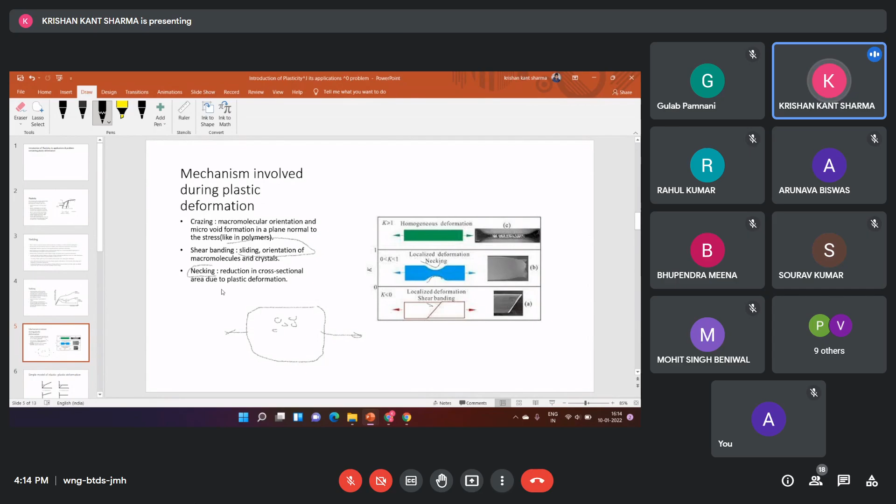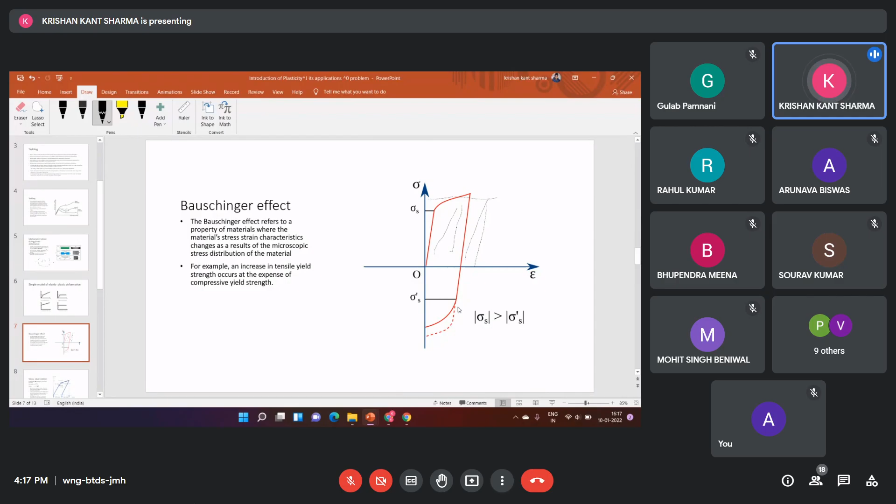Its yield limit will change - this is the effect of the Bauschinger effect. For example, when we apply tensile stress on a material up to the yield stress limit, then unload it, and then apply stress again as compression stress - opposite direction to the first one - then it will show its yield limit is now less than the initial yield limit. This is the Bauschinger effect.

Generally we neglect this effect during our study because we choose the same yield limit for compression and tensile stress for our study purpose.

Now I will show you, as in plastic elasticity analysis we study Hooke's law for stress-strain analysis, but in plastic strain there is no particular law for study. There are some empirical stress-strain equations for this. One of them is the Ludwik-Hollomon law, in which the stress-strain relation involves an exponential coefficient for the applied stress.

This will show the curve formation, and we will show the effect of the strain hardening coefficient, generally for ductile materials. So, strain hardening in general.

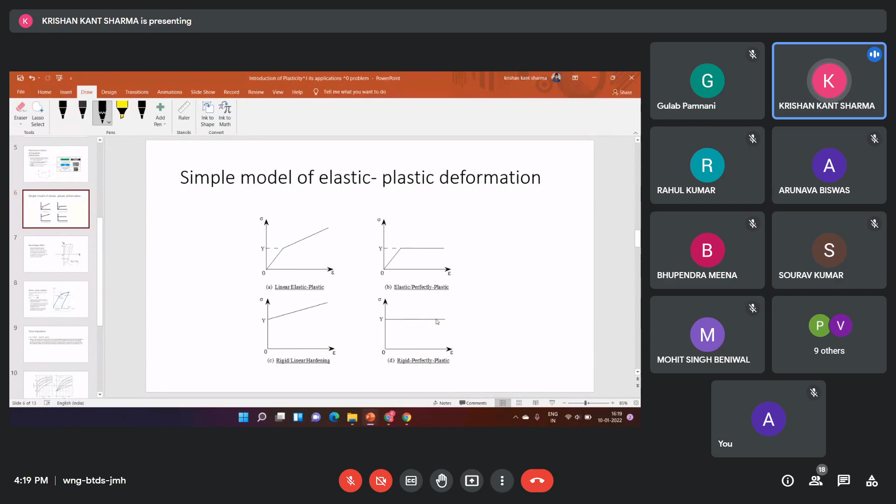The plastic strain is considered as the localized strain with respect to study, in which the total strain is the plastic strain plus elastic strain, and this formula is for plastic deformation up to the yield point, from the non-linear elastic limit to the yield point, as we study what the material's path is to failure.

Higher the value of strain hardening, the more hardened the material. If n equals 1, then the material behaves as an elastic material for the linear limit, as we use in Hooke's law. There is another equation for plastic deformation - this is the Voce equation, which also relates stress and strain.

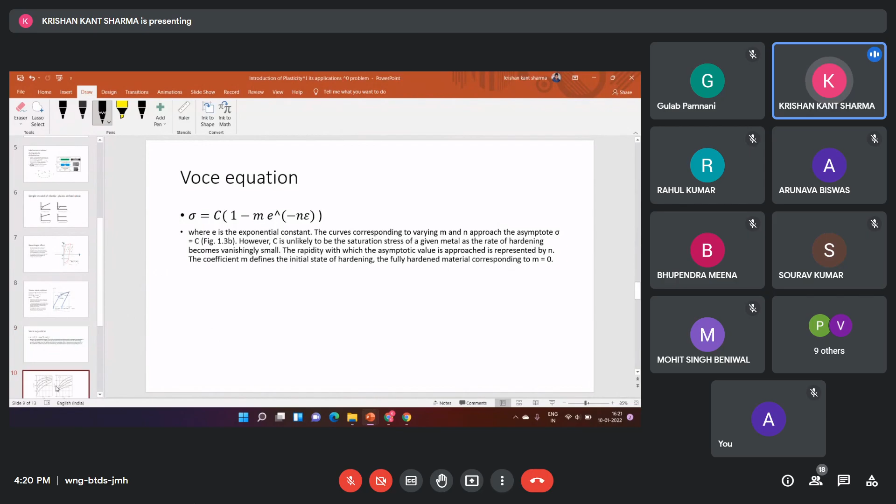As shown in these graphs from the empirical equations, as the strain coefficient increases, the strain hardening also increases. As we study in the material, strain hardening increases with the strain hardening coefficient, and its work increases exponentially.

For further information, the next group will elaborate. There is another relation - also an empirical equation - from the Ramberg-Osgood equation. It also relates to the strain hardening coefficient, which will show the relation curve of the strain curve for different strain hardening coefficients.

Okay, these are some basics about plasticity, and there will be more information about this. We can take some theory books in which more details are shown, and we can also refer to some NPTEL lectures. Now my friend Arunava will give you some abstracts.

Before moving ahead - yes, sir. I hope you have covered your presentation, right? Yes, sir. So I have some questions. Yes, let's take it. Okay, first go to the first slide. This is just suggestions, not questions, right?

Here, these statements that you have on the left side - did you write them on your own, or the paragraph? No sir, I took it from the book and some NPTEL lecture. So that's what I'm saying - you should write your own bullet points. What you are planning to convey in a particular slide, you should write that as bullet points instead of taking a direct image from whatever you see. Okay?

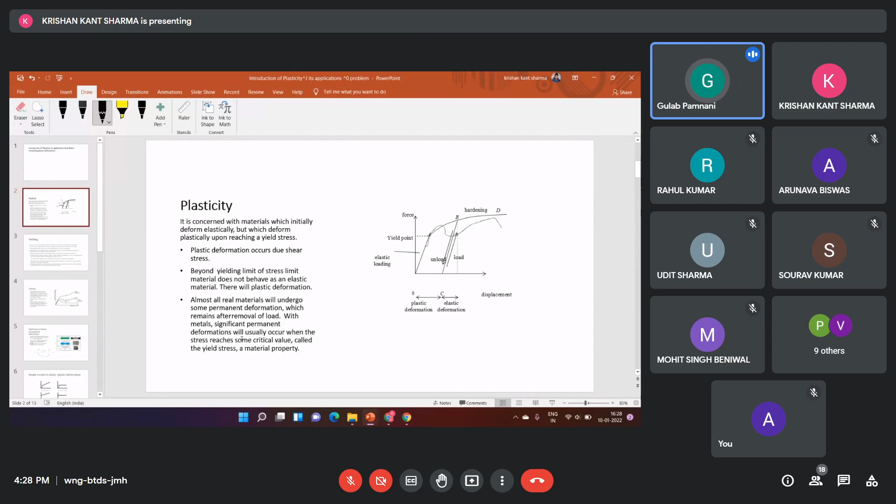Yeah, so that's the answer I was expecting. What Udit has said, there are applications where you work on materials in the plasticity regime, like he said - when you go for manufacturing of components, you go for deep drawing, extrusion, or whatever you are doing. In the process of manufacturing, the application of plasticity comes in.

Not on the shaft, as I was saying as an example. The structure you are building, there you are ensuring that the material doesn't yield. There you already take a factor of safety and all those things, and you are not willing at all to go into the plastic limit - that it may go, that's a different case, that's a failure, right? Yes, sir.

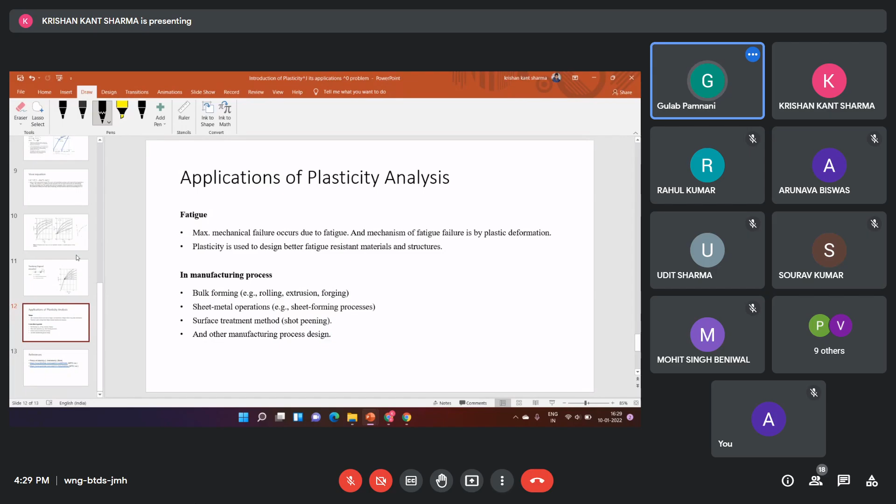आपने एक स्लाइड पे जाओ। Now there was you talked about the sliding somewhere, right? Sliding. So and strain hardening की बात की। strain hardening क्यों होता है?

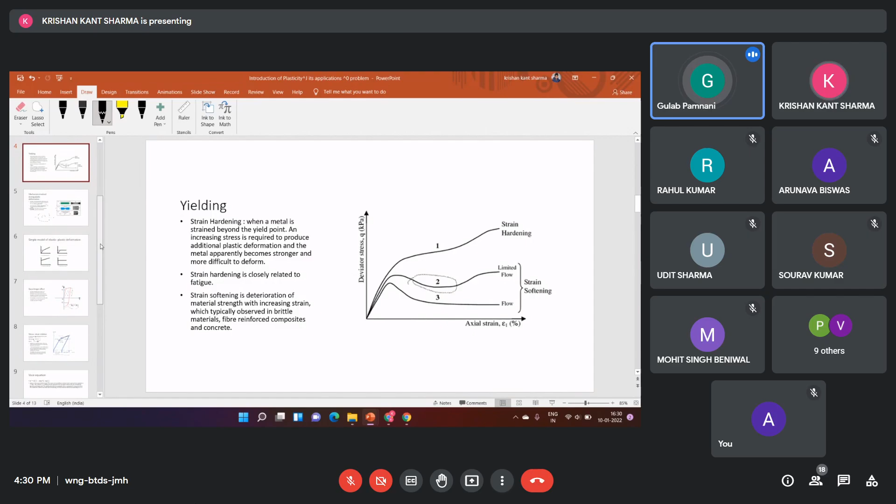स्ट्रेन हार्डनिंग होती है जैसे मटेरियल की स्ट्रेस इंक्रीज करने के लिए, स्ट्रेस इंक्रीज करते हैं इसके लिए, तो उसमें वो स्ट्रॉन्गर बनता जाता है, मतलब उसकी प्रॉपर्टी। yeah, that's okay, but why does it happen? What is actually the reason behind it? You need to explain it.

Sir, is there any dissipation of energy to the molecules? वो तो प्लास्टिसिटी की बात कर रहे हैं, परमानेंट डिफॉर्मेशन, स्ट्रेन हार्डनिंग पे हम कह रहे हैं व्हाई। आपने कहीं मोमेंट ऑफ डिसलोकेशन की बात की? Yes sir, movement of dislocation sir, कहाँ पे बात की थी? yes sir, movement of dislocation sir.

So this movement of dislocation increases the resistance to the applied stress, yes sir, जिसकी वजह से स्ट्रेन हार्डनिंग होगी, ठीक है? yes sir, ओके।

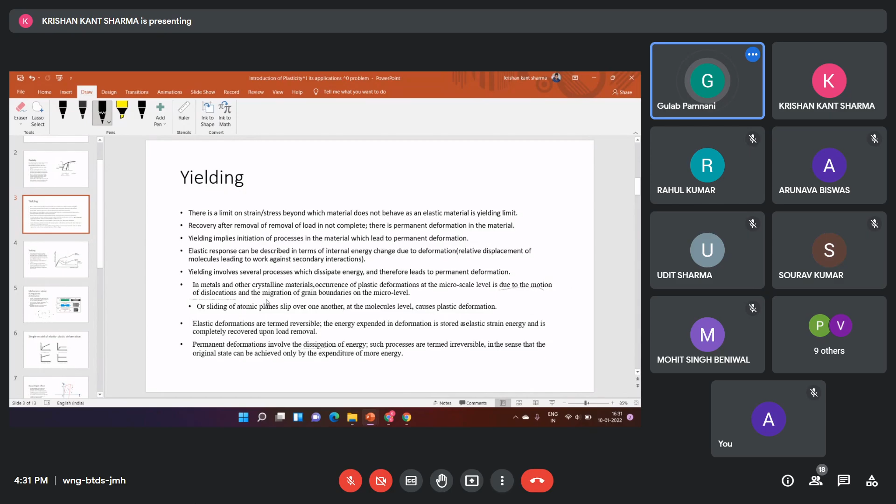Now let's move to the stress strain relation that you talked about. यहाँ पे ये स्ट्रेस स्ट्रेन रिलेशन जो आपने दिखाया है, ये प्लास्टिसिटी डिफाइन करता है कि नॉन लीनियर इलास्टिसिटी डिफाइन करता है? Non-linear elasticity sir।

तो आपने प्लास्टिसिटी की बात की ना कि... Actually sir, this is not only for the elastic deformation, it's also for the plastic deformation study।

अच्छा, ये प्लास्टिक डिफॉर्मेशन में वैलिड होगा? Yes sir, it depends on curve slope sir। अच्छा, तो अगर मैं इसमें एप्सिलॉन को 0 कर दूं तो सिग्मा की वैल्यू 0 आ जाएगी, yes sir, है ना?

तो जब आप इसको प्लास्टिक जोन में देखते हैं, ये इलास्टिक प्लास्टिक को बता रहे हैं, नॉन लीनियर इलास्टिक को बता रहे हैं, या प्योरली प्लास्टिक को बता रहे हैं? ये रिलेशन मुझे जरा बताएंगे। in plastic region sir। सिर्फ प्लास्टिक रीजन में?

इसको थोड़ा पढ़िएगा, क्योंकि मुझे ये लग रहा है कि ये नॉन लीनियर इलास्टिसिटी का इक्वेशन आपने लिखा है। Okay sir, ठीक है? प्लास्टिक रेंज में नॉर्मली जो सिग्मा है डायरेक्ट एप्सिलॉन से कोरिलेट होने की बजाय इंक्रीमेंटल फॉर्म में होता है, ठीक है?

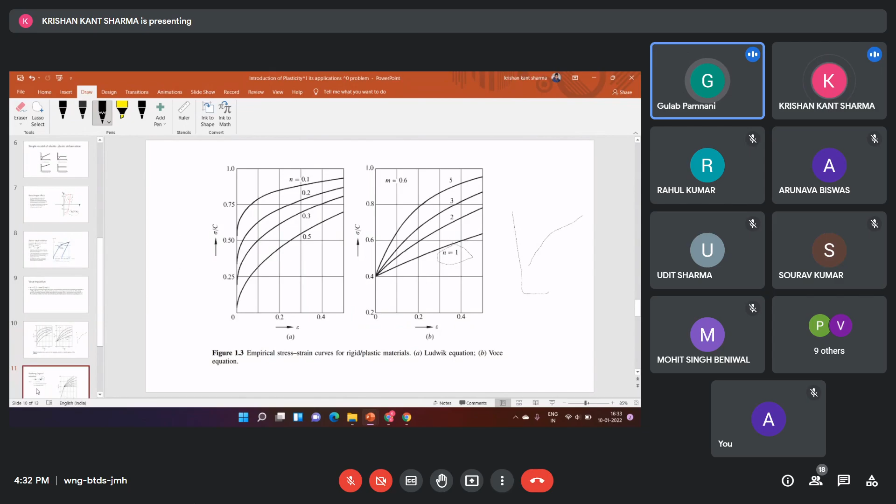जस्ट गो अहेड एंड सी इट। रेम्बर्ग ऑसगुड मॉडल भी जो आपने बताया, ये सब इलास्टिक तक तो वैलिड नहीं, इलास्टिक के बाद के लिए वैलिड है, राइट? आप ये कह रहे हो कि रेम्बर्ग ऑसगुड मॉडल जब आप इलास्टिसिटी क्रॉस कर गए, उसके बाद के इक्वेशन के लिए ये वैलिड है, फिर उसमें एम आपके स्ट्रेन हार्डनिंग कांस्टेंट और ये जो आपने अल्फा कहा...

so these will vary after once you cross the yield, then this relation is valid, right? Yes sir। विद इन इलास्टिक तो आप ये कह रहे हो कि इस डायग्राम से this is Hooke's law? Yes sir, Hooke's law, yes.

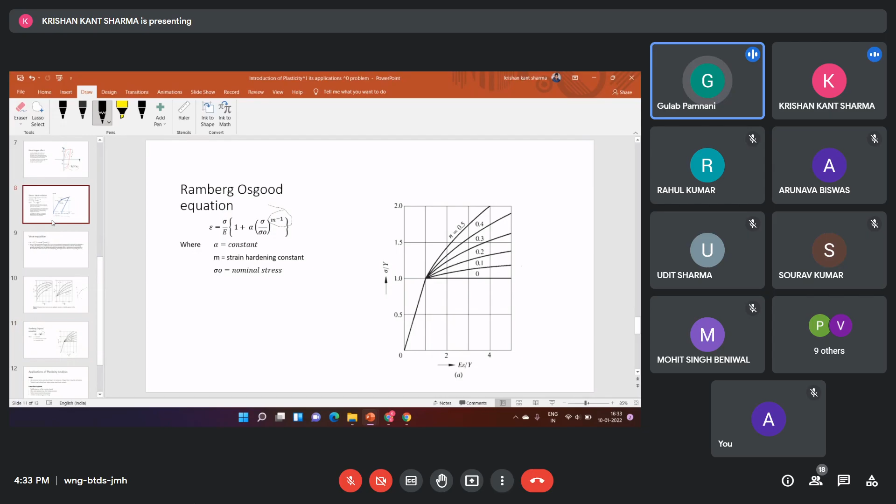Up to yield limit. हाँ, तो पिछली वाली जो इक्वेशन हमने कही, दैट इज व्हाट यू शोड, इसमें अगर n की वैल्यू 1 कर दूं तो हुक्स लॉ वैलिड है, ठीक है? yes sir। और अगर दूसरी कोई वैल्यू करूं तो, मुझे अभी भी लगता है दिस लुक्स लाइक नॉन लीनियर इलास्टिसिटी।

Okay sir, up to yield limit. हाँ, तो नॉन लीनियर इलास्टिसिटी में मतलब वो हुक्स लॉ फॉलो नहीं कर रहा है, मगर वो इलास्टिक है, राइट? Okay sir।

Good afternoon, sir. Yeah, good afternoon. Good afternoon, everybody. Myself, Arunava Biswas. Today I am going to describe about application of plasticity.

As we all know, plasticity is the propensity of a material to undergo plastic deformation under load. Here are some pointers to answer why we apply plasticity.

The first one is fatigue. Fatigue is defined as a process of progressive localized plastic deformation occurring in a material subjected to cyclic stresses and strain at high stress concentration locations, that may culminate in cracks or complete fracture after a sufficient number of fluctuations. As we know, maximum mechanical failure, approximately 50 to 90%, are by fatigue, governed by plastic deformation. So in order to design better fatigue resistant materials structure, we use plasticity.

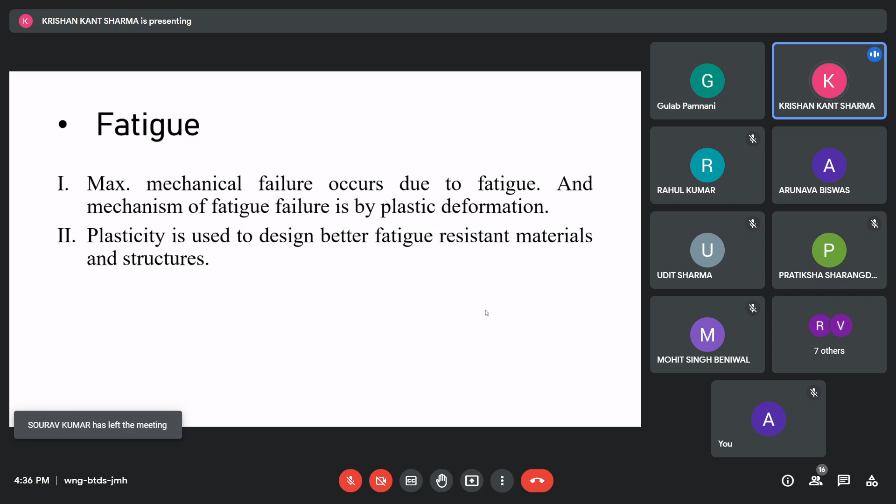Second one is the manufacturing process. Plasticity is used in manufacturing process design. Plastic deformation is involved in many mechanical forming processes. Some are rolling, forging, extrusion, wire drawing, deep drawing, and many others.

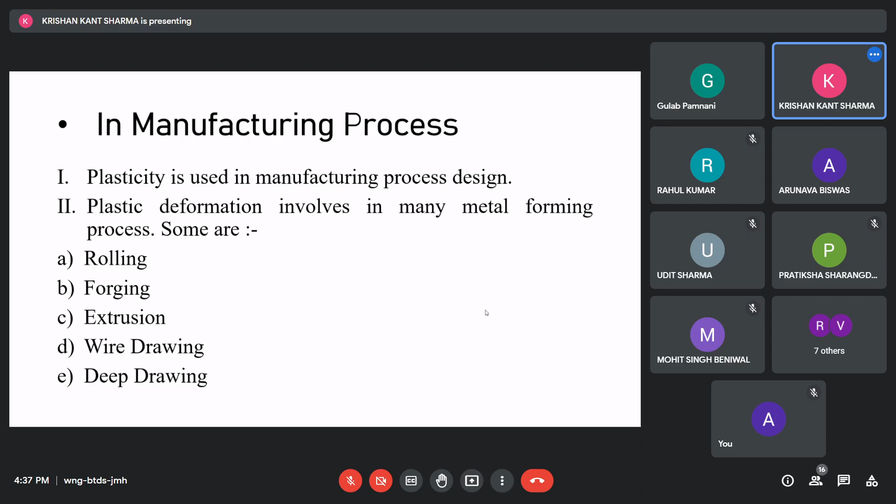In rolling, material is plastically deformed by passing between rollers. The plastic deformation in material is due to the biaxial compression applied by the rollers on the material.

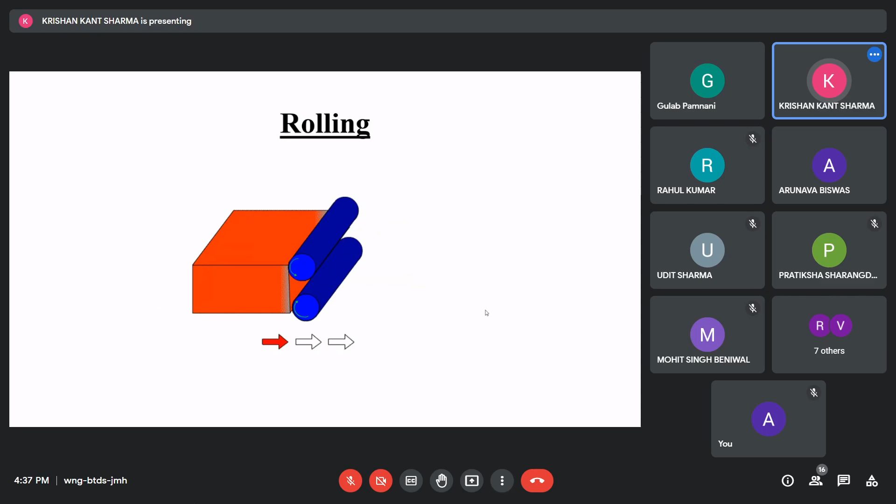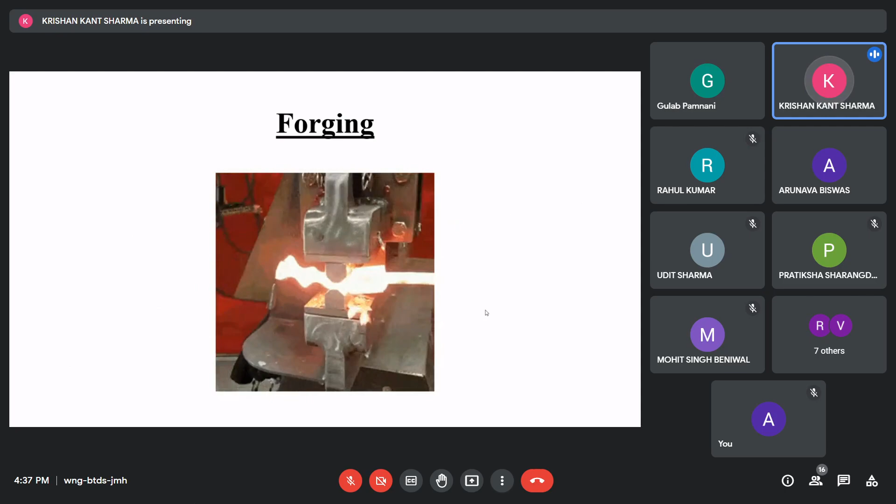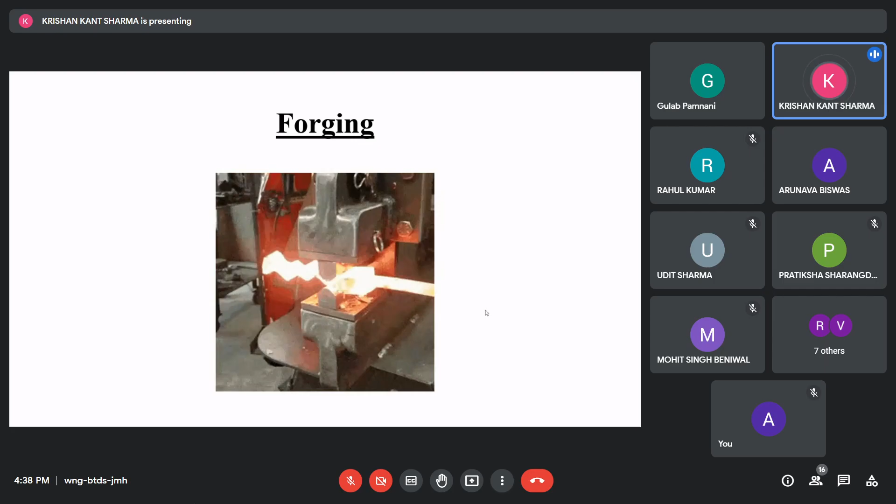In forging process, material is plastically deformed through hammering, pressing, or rolling. The compressive forces are delivered with hammer or die. So the plastic deformation in metal is due to the compressive forces applied by the hammer or die.

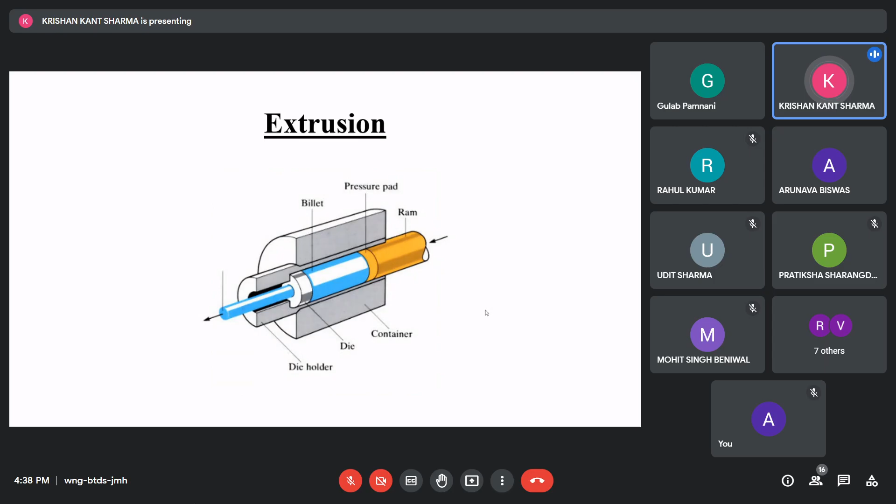Extrusion is a process which is used to create objects of a fixed cross-section profile by pushing material through a die of a desired cross-section area. Here, plastic deformation in material is due to triaxial compression.

Now, wire drawing. Wire drawing is a cold working process used to reduce the cross-section area of a wire by pulling the wire through a single or series of drawing dies. Drawing operations involve pulling material through a die by means of tension force applied to the exit side of the die. Here, the plastic deformation is caused by the compressive force arising from the reaction of the metal with the die.

Deep drawing is a sheet metal forming process. The process is considered deep drawing when the depth of the draw part exceeds its diameter. It is a combination of drawing and stretching. In this process, sheet metal blanks are converted into desired shape of component by pressing the central portion of the sheet into die opening using a punch. So here, plastic deformation of metal is due to the compressive force and tensile force.

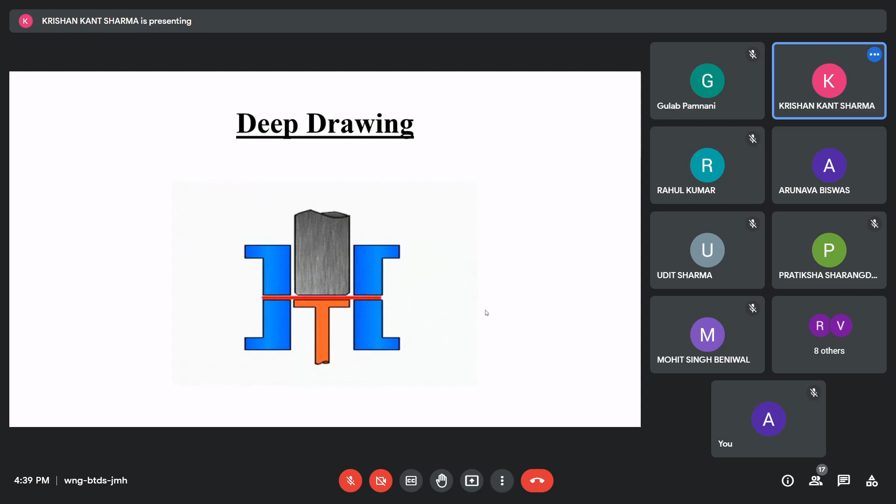Okay, so mostly you have covered the applications, right? Yes, sir. Okay, so nothing much to ask in this. I don't think there is anything to ask. So let's move to Udit then. Okay, sir, thank you sir.

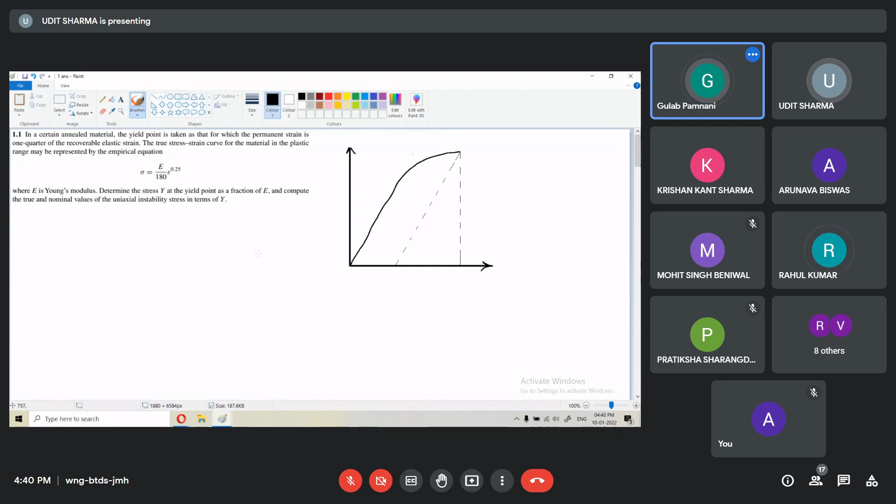So I'm going to discuss some questions related to plastic deformation, which I have selected from the book. Is my screen visible? Am I audible? Yes, hello, it is. Okay, so should I start? Okay, go ahead.

In question number one, we have a certain annealed material whose yield point is taken as the point for which the permanent strain is 1/4 of the recoverable elastic strain. The stress strain curve for the plastic range is represented by an empirical equation. We have to find the stress at the yield point in terms of E, and the true and nominal value of the uniaxial instability stress in terms of Y.

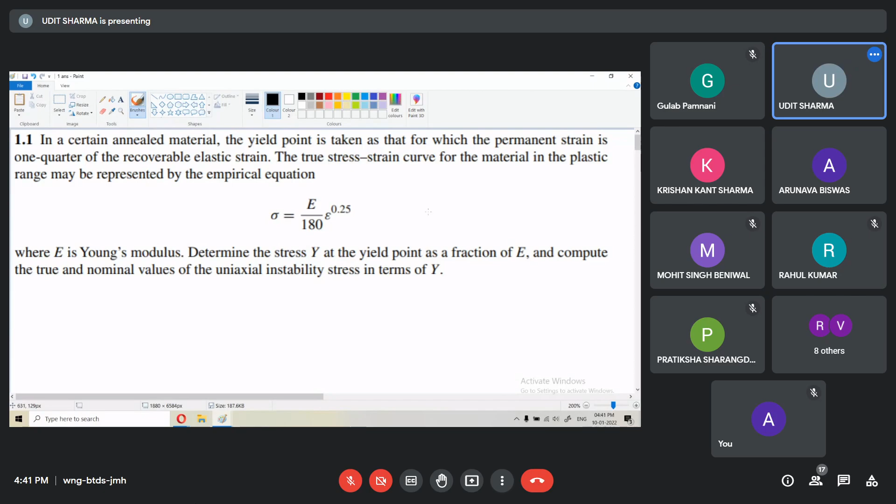So we are annealing a material. Annealing simply means we are heating a material above its recrystallization point and allowing it to cool down in the furnace only. That is a way of reducing the stress after casting.

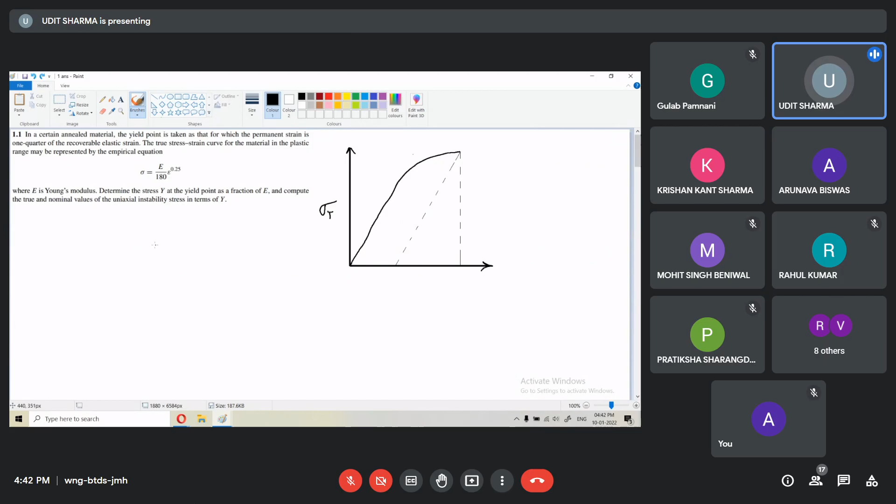So I have drawn a graph here already, which shows the true stress and true strain values between them. So here our material is going from O to A and to B. From O to A is the elastic limit of the material, and from A to B is the plastic limit.

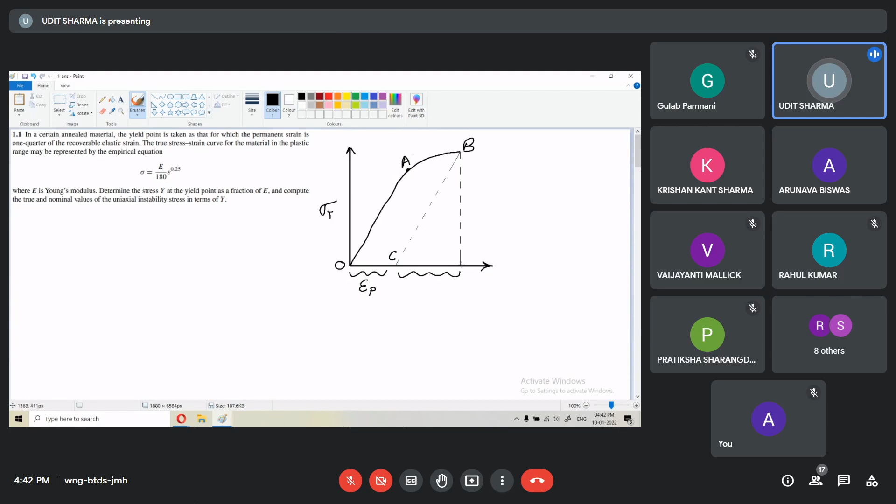If we unload the material at A, the material will return to its original position O. And if we go beyond point A, till point B, it will only return to point C. So whatever we do, we cannot go back from point C to point O. So this portion will be called the permanent strain portion. And because this portion of the strain is coming back or recovering, this is called temporary strain or recovery strain.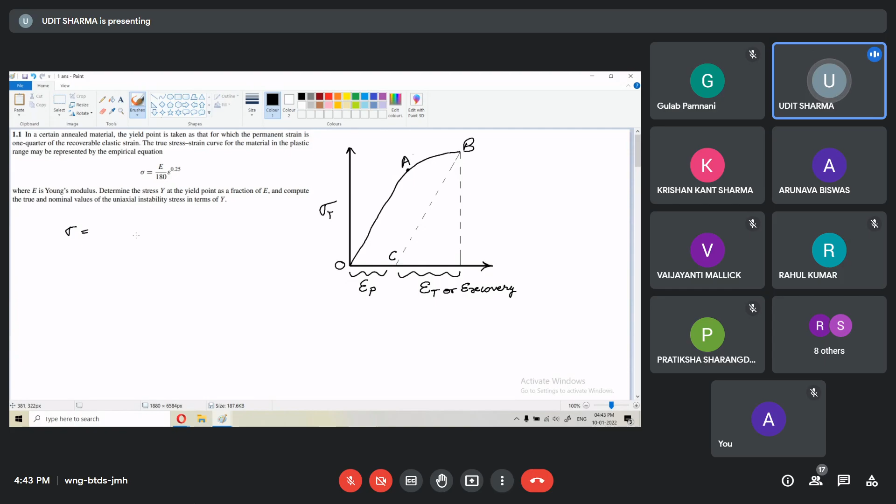So here we can easily start by, we have an empirical relation as E over 180. So first we need to find sigma at B in terms of E, and we need to find sigma at A. Yes, we need to find ultimate at instability. Instability, I'll explain in a minute.

So we start by first calculating the strain at point B. Strain at point B we can easily conclude as permanent strain plus our temporary strain. As given in the question, the permanent strain is 1/4 of the recoverable, 1/4 of the temporary strain. So that will give us the value as 5/4 of true strain.

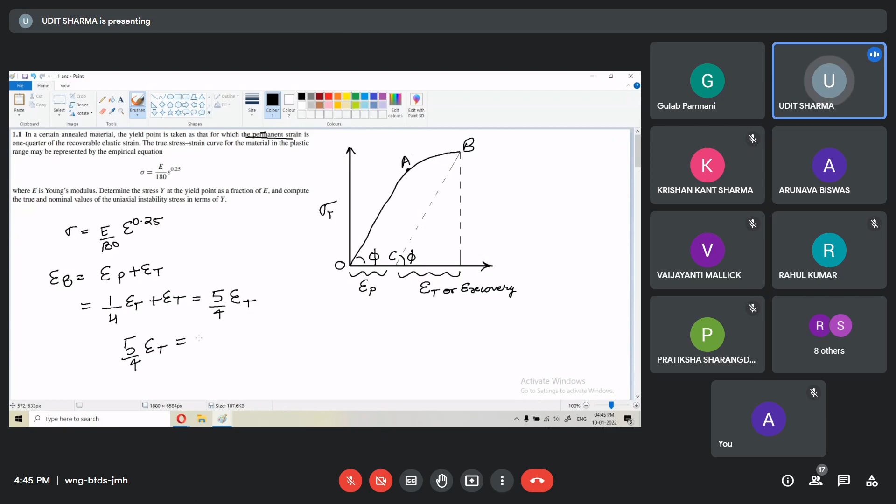Now we can easily put this into the equation, this is yield, E over 180, 5/4 of... sorry, I forgot one important thing before this. I need to explain, very sorry for this. We need to further divide the temporary strain into components. So this slope, at this point and this point, is the same. And we all know the slope of the stress strain curve is equals to this part, sigma yt, yield, and this one is the temporary strain. The slope of the stress strain curve is E, the Young's modulus, sigma yt divided by epsilon t.

So we can easily put true strain as yield stress over Young's modulus. We need to put that here, it becomes this. Now we put this in our main equation.

Yes sir, Udit, can you come again? Sir, which part, from the start or some point, not between? From this, not from the start. You have added this strain, that's fine, 5/4, okay, epsilon times t, whatever you said. Okay, then after that you can proceed. So replacing epsilon t with sigma y by E, this part. Yeah okay, that's fine, that is clear to me. Okay go ahead, go ahead. Should I explain it to others again or should I go ahead? Others, if anybody has any question they can ask, or we can proceed. No sir, okay you can proceed then.

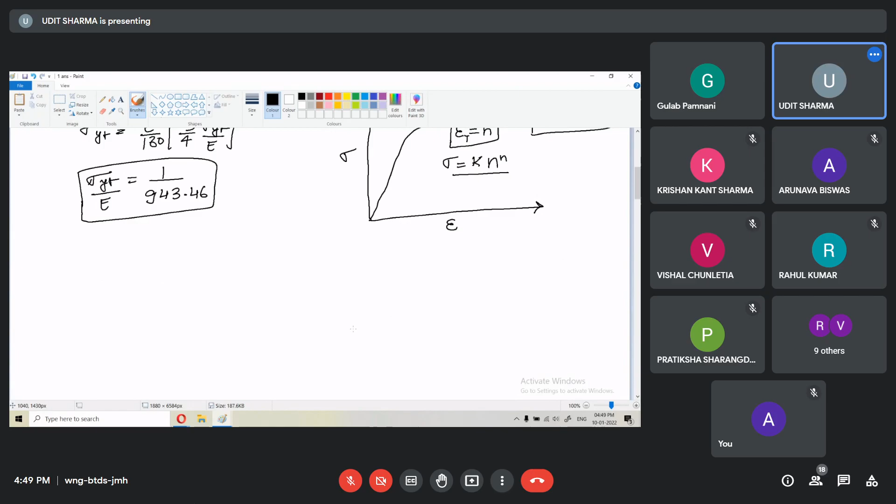And for this position we have a very simple rule: the true strain developed at this position is equals to n. This n is the empirical value in our equation, sigma equals K epsilon to the n. This n comes from here. So strain becomes equals to n, so our stress will become K times n to the power n. So from here we'll continue. So we are saying that epsilon t would be n. That is observational, I don't know the derivation behind it, it's just a property.

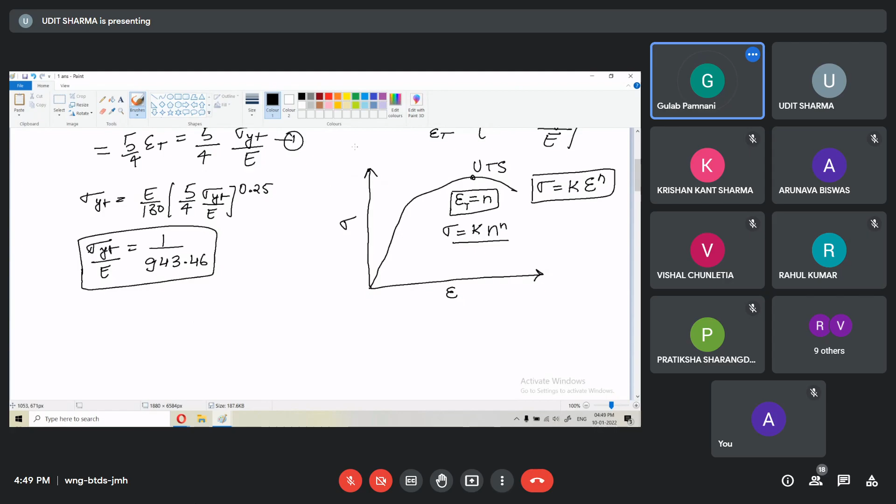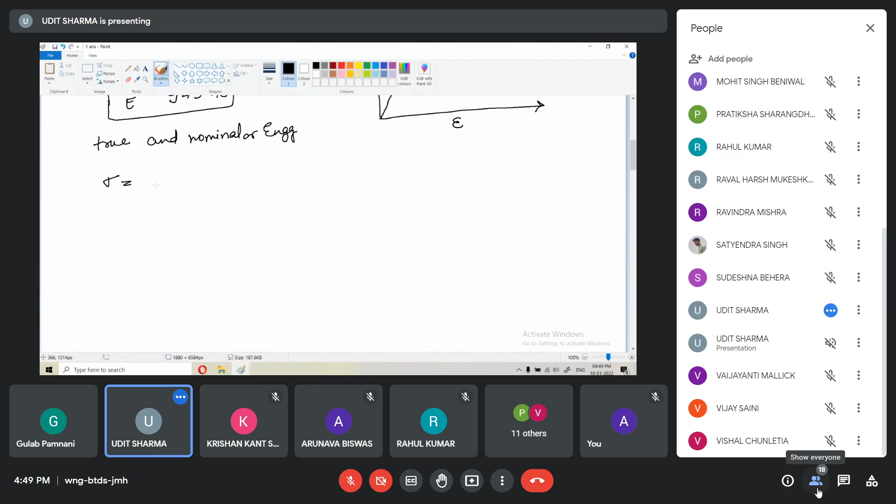So we now need to calculate two values: the true stress and the nominal stress. True and nominal. Nominal is also called engineering, engineering stress or strain. So first we can calculate true is equals to E over 180, epsilon. This is our empirical relation.

Now we can easily say epsilon is equals to 0.25 at necking position, or instability position is equals to E, if we calculate this. E will come out to be 943.

Here he is asking to calculate the sigma ut, the ultimate tensile strength, in terms of yield stress. Yield stress in terms of E we have already calculated here. So from there we can pull the relation down: E is equals to 943.46 sigma y. We can put this relation over here, so we get sigma is equals to 943.46 by 180.

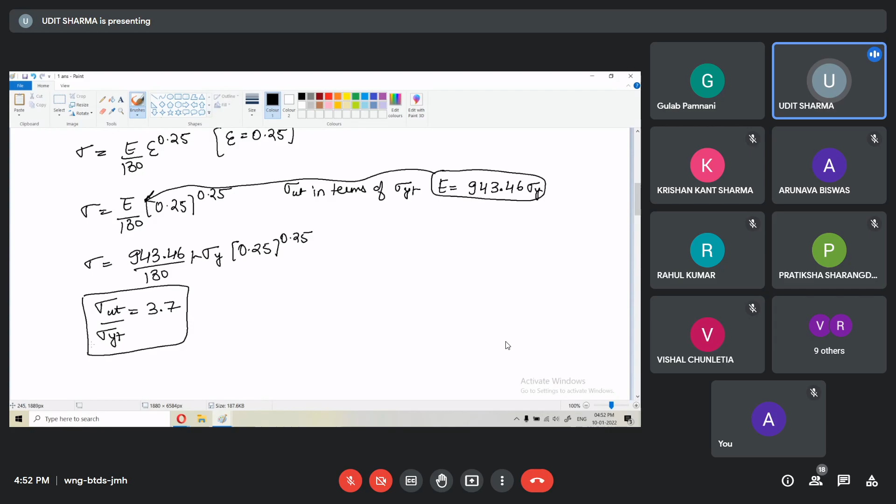Now to calculate the nominal stress, we need to first establish the relation between the nominal and the true and the engineering stress. The true stress is represented as the engineering or nominal stress times 1 plus e epsilon. This is one relation. The strain here is engineering strain, and the true strain is calculated as ln of 1 plus nominal.

So here we can easily put 1 plus nominal. From this equation we can easily pull out e raised to power et. This is an important observation. We can put this observation into this equation and we'll get true stress equals nominal stress times exponential of true strain. This is the relation we get.

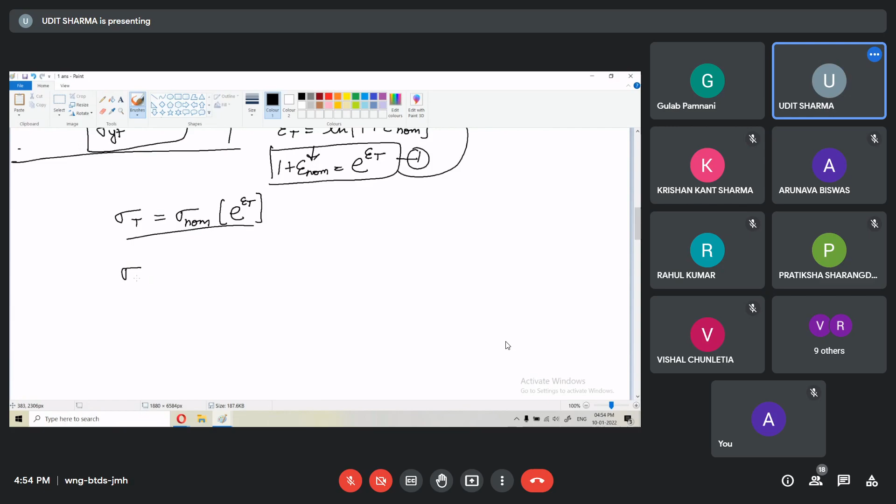Now we all know we are talking about the point of instability. So at instability, the true strain equals 0.25. We have actually calculated the true strain at this portion, and this value and this value are both the same, so we can divide it by yield strength. This will get us 3.7, and our nominal stress in terms of yield stress comes out to be 2.88.

That concludes our first question. Is there any doubt in this? If anybody has any question, please ask.

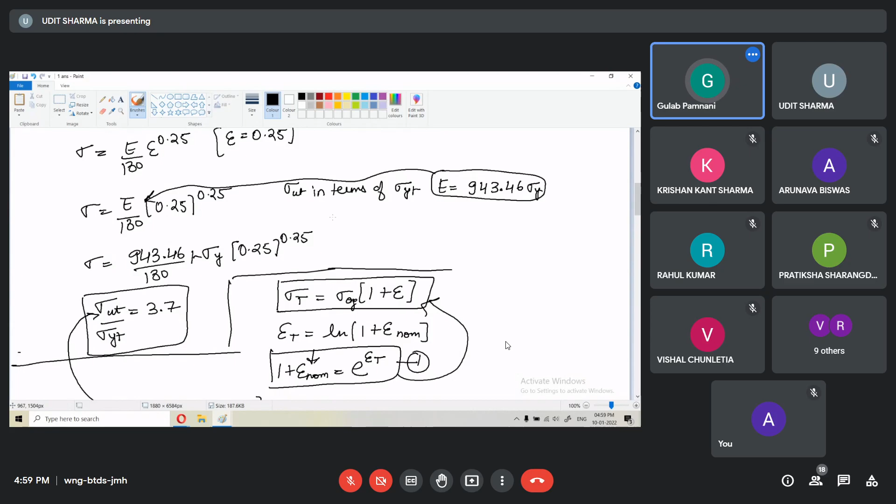If anybody has any question on this example problem that Udit has taken. No one is asking any questions. Okay, we'll stop here today then.